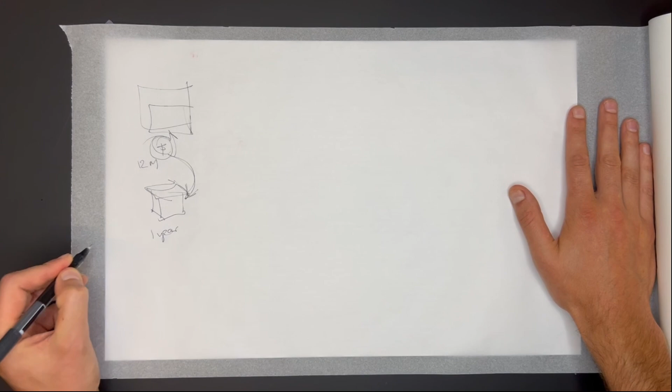So I did some research, and basically the numbers ended up being 10 grand. I don't remember what the monthly rent was, but 10 grand. So I needed to build this little office space for 10 grand. Then the other thing going on was, I was renting our home. The landlord had a coach house with a motorhome in the bottom, and we lived up top.

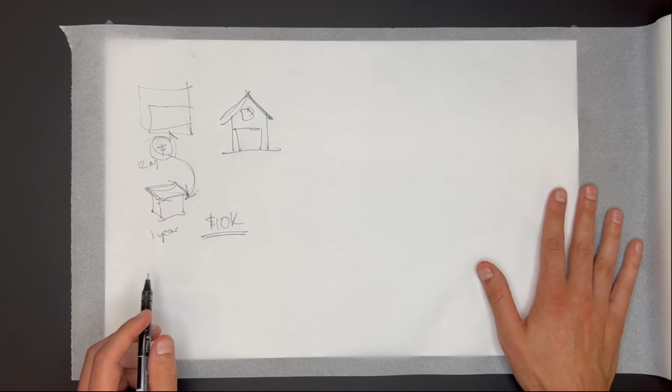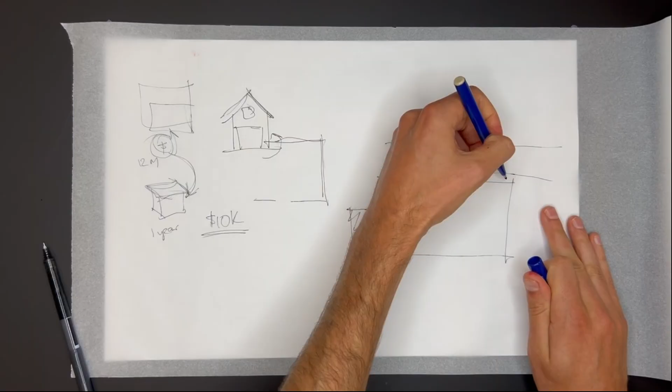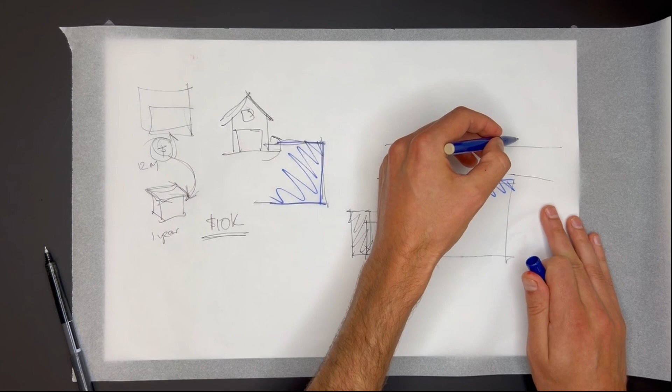And then behind there, there was a small little spot. So if I was to draw, here's the little coach house. There was a driveway that kind of came around the side. My door in was right here. Actually the patio was kind of like this. We had some garden beds here. There was a shed here. So we're kind of looking at two buildings. There was a hedge and trees. Here was garden beds in there, door in, stairs down, a bit of a lawn.

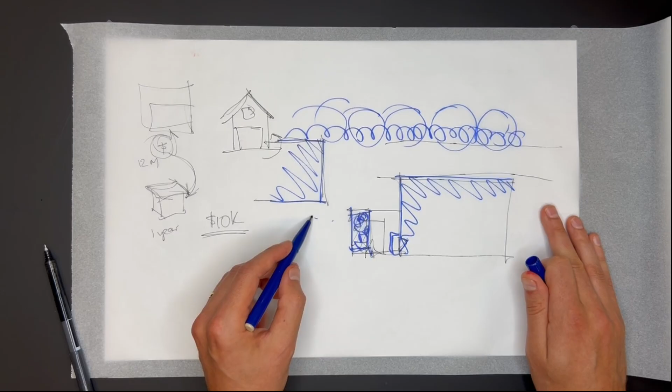And so I spoke with my landlord. So where can I build something here somewhere? Because this was kind of my space-ish. And he was very generous. He said, yeah, sure, go ahead, as long as I can move my lawnmower in and out of here, and I can move my trailer in and out of there, and I can pull in and turn around with a vehicle and all that stuff. So eventually I had a clear space of kind of this. It ended up being very small.

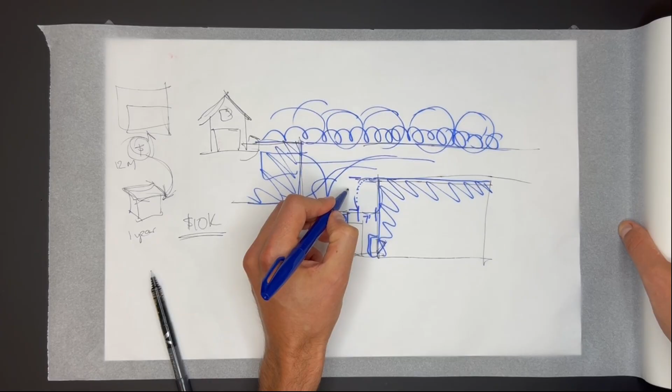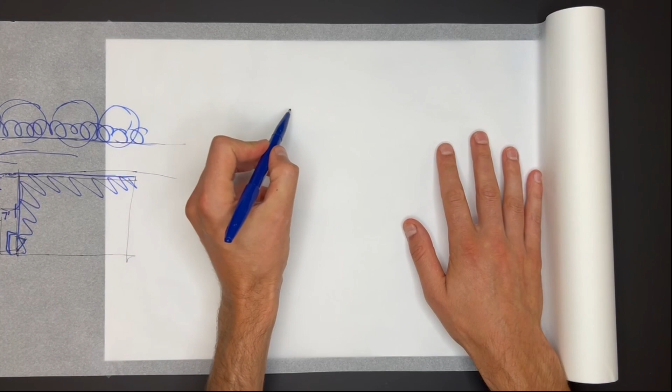So how big was that? It was about 7 feet by 11 or 12 feet. So I had kind of a 7 by 11 rectangle to work with. So quite small, 77 square feet total. At the end of the day, I was going to be working in this 12 months of the year. It had to be insulated, so you take some space off of that for wall thicknesses. And the space I really ended up working with was 6 by 10. So this became a 60 square foot studio.

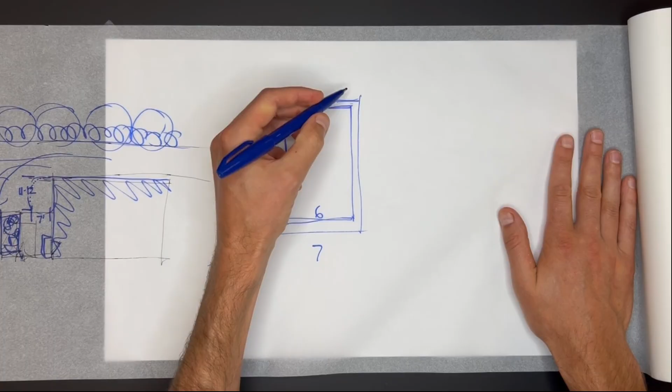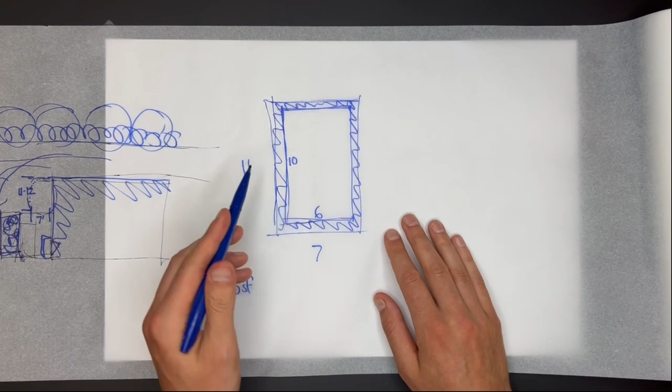And that was an interior space. And then once you built the walls up, it ended up taking up my full 7 by 11 approximately. So that's how that happened. Now this space in here that I was working with, this is south. This is north here. So the sun, I'm living in Canada, the sun comes around like this. Wait, no, I'm looking at this wrong, sorry. All right, north was here. Yeah, this is making more sense. So north is up.

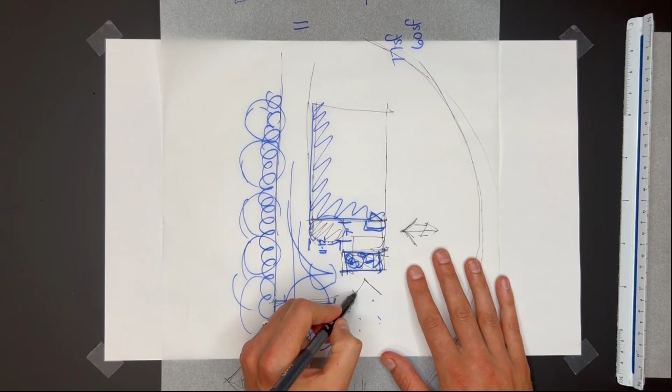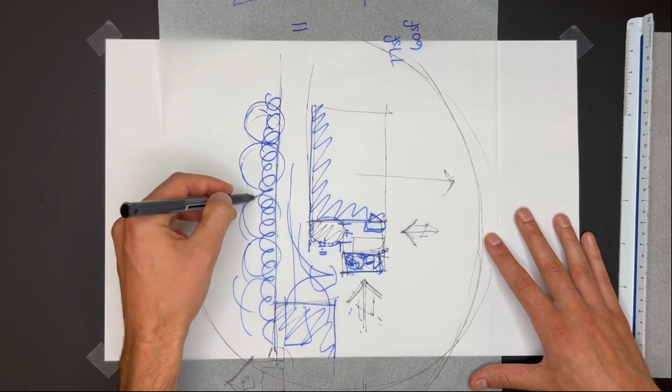So the sun is doing this. I had really good morning views that way. That's why I'm remembering this. This was east. I was totally obscured this way, west, by these big trees. And the view this way here was trees as well, mostly. There was a neighbor's house kind of over here, but that was pretty far away. It was pretty private space in here.

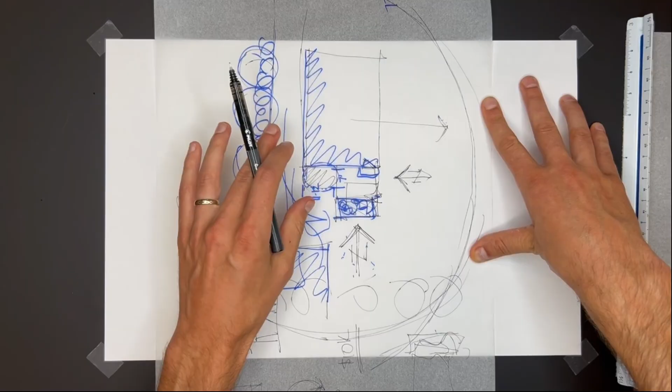So this studio in large part started with views. If I was to look this way, I would like the view up here, up towards trees. That was nice. But down here, you're just looking at cars. I parked my car here. My landlord would be pulling in and out. View this way, kind of garbage. I'm looking at an open shed here, a lawnmower, and just scrap wood.

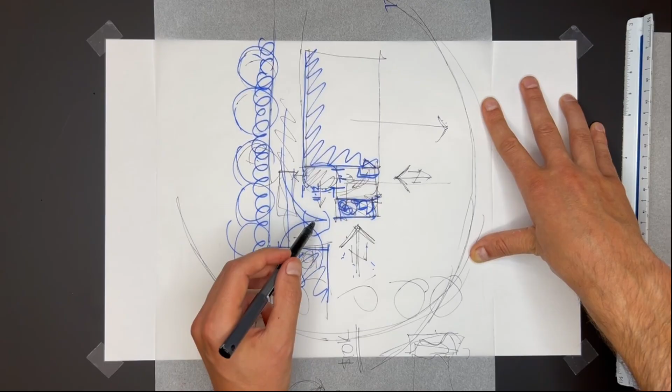View this way, super nice. Morning sunshine. I was starting work quite early in the mornings. Morning sunshine, looking at my gardens. I could see my family entering and exiting. That was great. So what this studio ended up being, I'm drawing this again. Okay, so here's north. North is up.

This studio largely ended up being, I'm going to look this way. That's at eye level. And then everything other than that, these are fine to look up and out. But there's nothing really to look at eye level. Here I was against the house, but the sunshine would reflect off and come in. So here as well, looking kind of up is fine to get some light in.

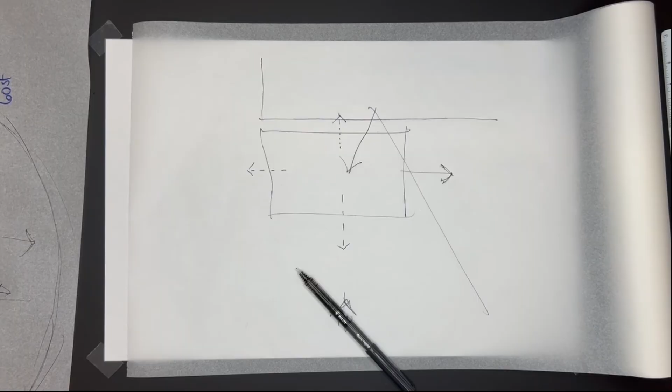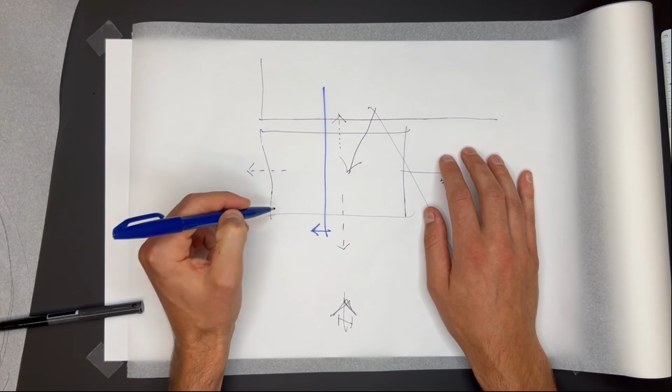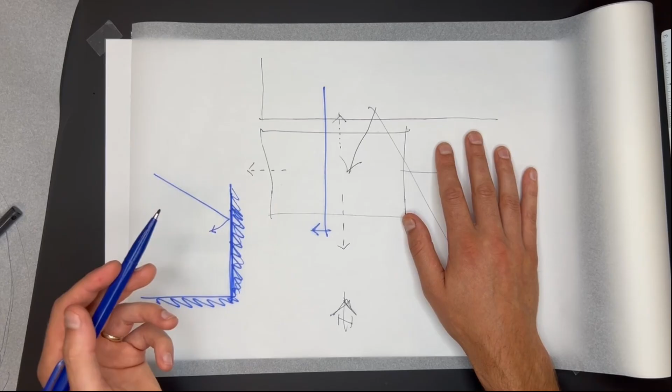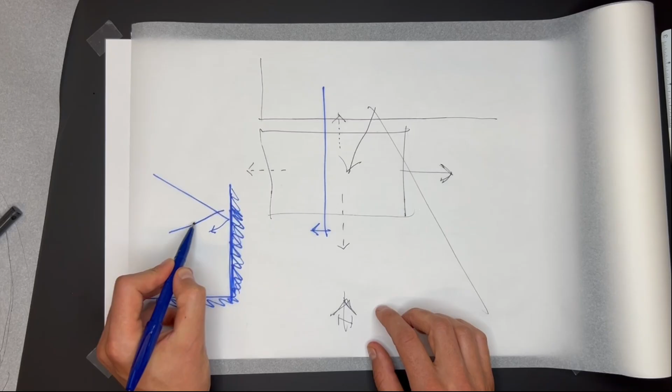Now, the other component of this, if I'm to cut through and look this way, I've got my landlord's shed and my house, or coach house. The big coach house where I was living on the second floor is right here. Here's the ground. Sunshine's doing that. My landlord said, okay, just one constraint, please: slope the roof away from the coach house, because rainy climate, so all the water would run off away from the coach house. So fair enough. That's what we did.

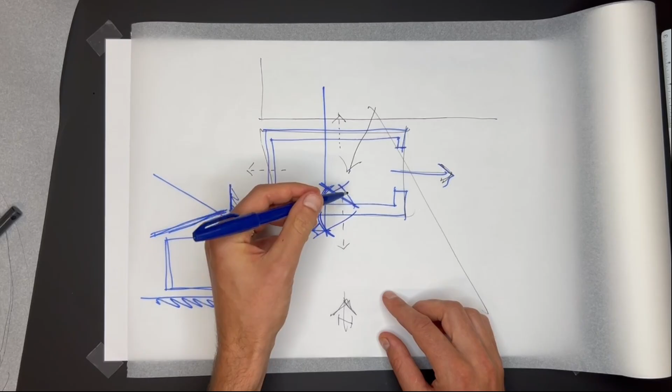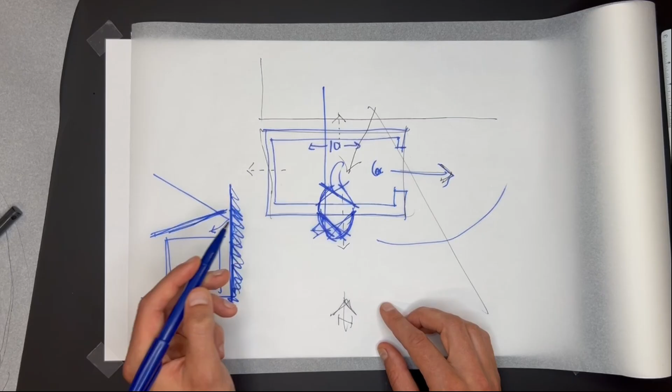So already now you can kind of see, I had something like this where you can look this way. This was kind of the logical point of entry. Actually, it's this way. No, it was out. You swing out. It was too small. 60 square feet. 6 feet here, 10 feet this way. It was too small to swing a door in, so I swung the door out. And then it swung this way, because I came from here. Obviously, you can tell it's been a while since I designed this. I'm just kind of recapping it now for you.

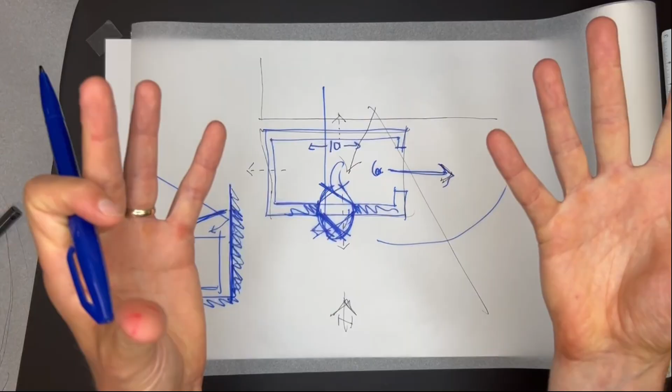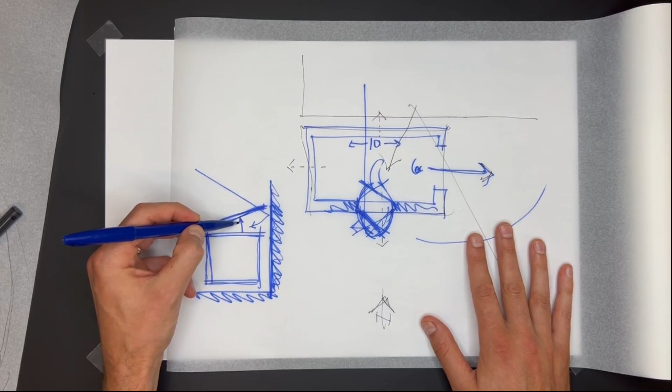So, the door swung out. I would look this way, and all the views everywhere else were just up. I wanted to have lots of light because I love sunlight. I want to not turn the lights on if I at all possibly can. So this very much ended up being kind of a box with a lid that was lifted to slope rainwater off and allow an open perimeter all around it. With such a small building and a few major constraints, it was really quite a simple form exercise to end up with: okay, here's your window out, here's your door. So basically a box.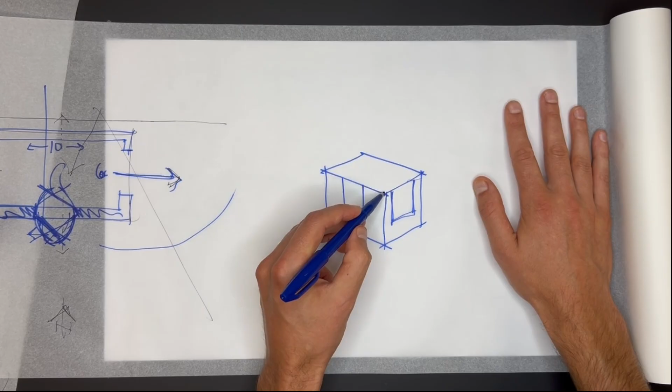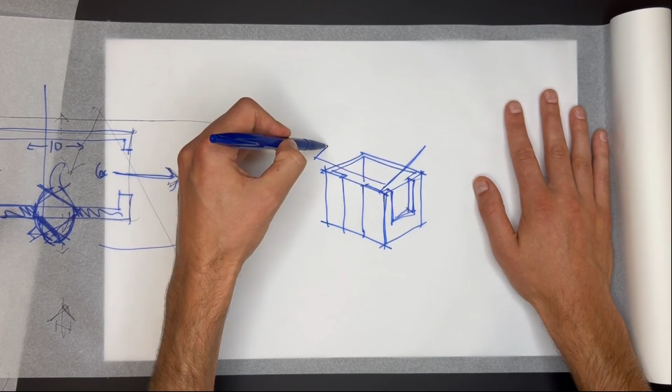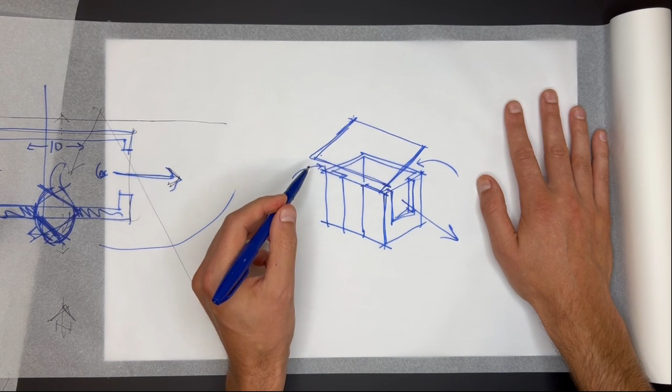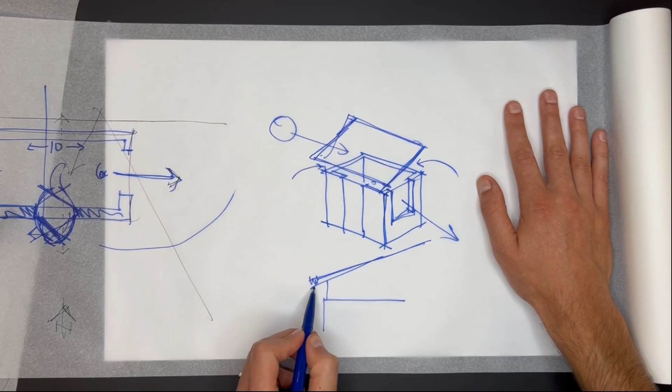And put a lid on there, slope it, to pull in light at the top, view out one way, and sloping it this way, I could shade much of the south sun. So the overhang on this was calibrated in such a way that, here's a section again through here, light at 45 degrees. Where I am, between March 21st and September 21st, the sun is at an angle above 45 degrees, and it's also the hottest at that time of year, late spring through summer. That hot sun would be shaded by the roof overhang.

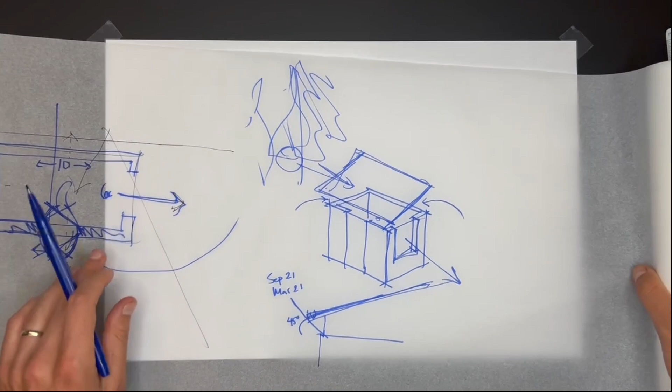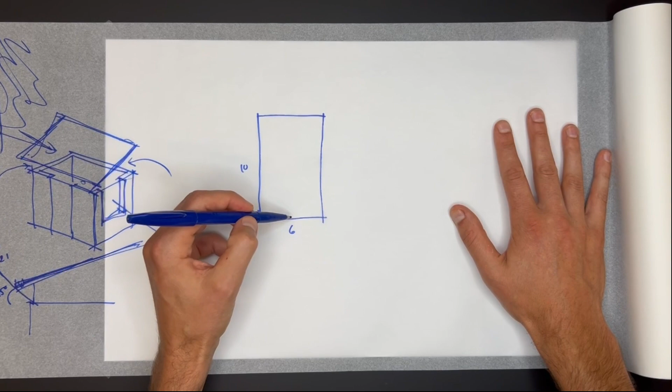The sun coming in the western side was shaded by these trees. I had these really, really large trees there that essentially created a wall for the western sun. So really I was shading the south, I was already blocked from the west, and I was accepting the east morning light. So I had a very simple form, right away, just given to me out of pure constraint. I had in plan six foot inside, 10 feet inside, window here. So I had these dimensions, the 6 and the 10.

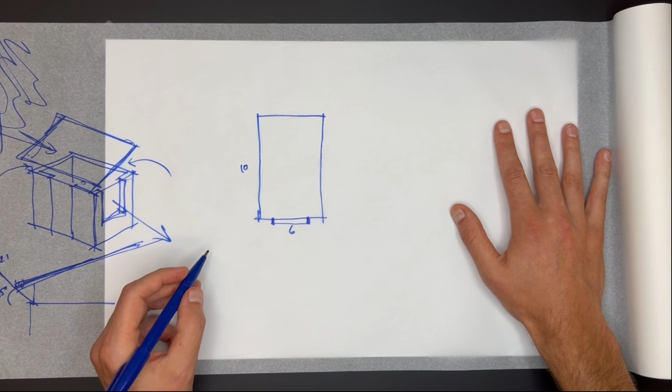We build out of dimensional lumber here. So after that, I decided, what's handy for me as an architect when I'm designing is to actually see the construction of how things get built around here. And here, it's a lot of light wood frame. So we use 2x4 lumber, or 2x6, or 2x8, 2x10. It's wood. Wood studs for walls, wood joists for floors, joists for roofs. Usually you get kind of I-joists for floors or roofs.

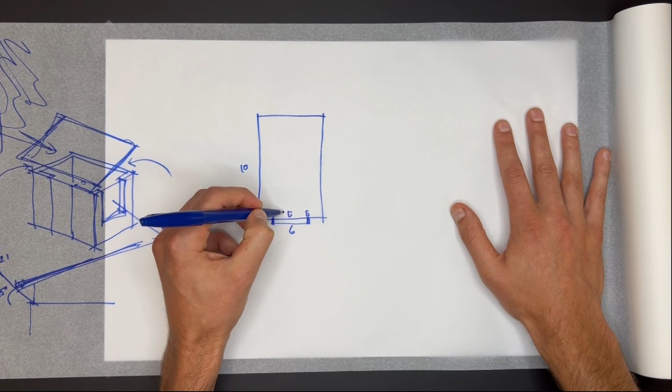So that's what would be handy for me to actually see in my space as I'm designing, to see the construction, the materials that the buildings I'm designing are going to be built with for the most part. So I thought, okay, I'll expose that structure. I'll bring it all to the inside, and usually it's kind of like a 2-foot bay. So it was a 6, and then it was a 10. So it was like 3 bays and 5 bays of structure. So it ended up being like that, and like this.

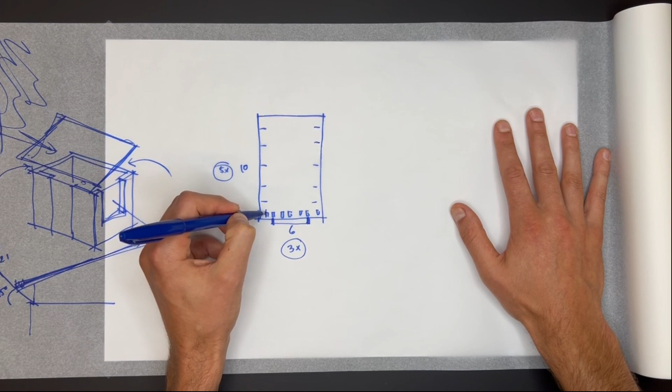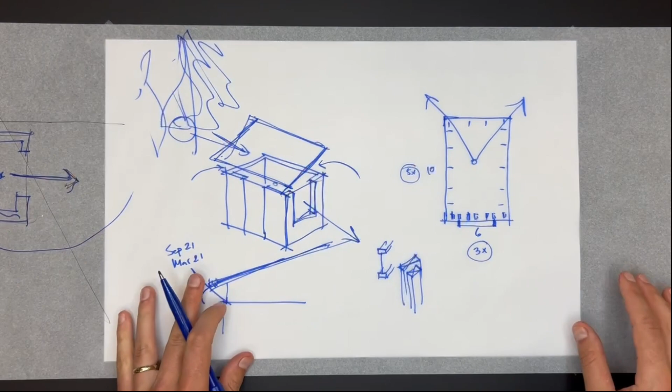Except I wanted to pull off the corners. If I was looking up and out, I wanted to pull off the corners and keep this perimeter as clear as possible, so it would feel like this lid was really lifted off. So what I did was I took my 6x10 box. I did something that was interesting, but ended up making it harder to build. I pulled the structure 1 foot off the corners.

So then I ended up basically, so 1 foot off of 6. I had 4 feet here, so there was a stud in the middle, stud there. And this was 8 feet from outside stud to outside stud. So it was actually 4 bays, 5 studs total.

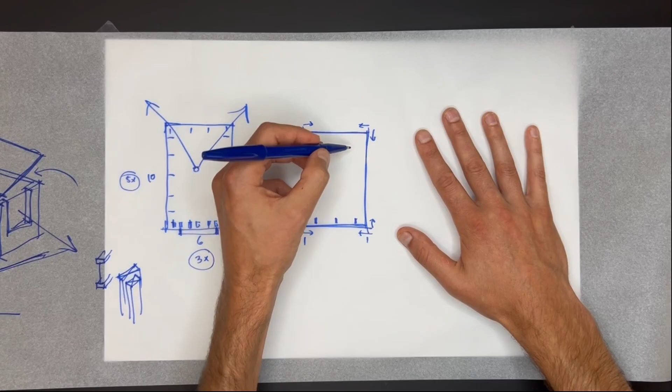Middle, that one, that one, that one, that one, that one. So it was kind of like this internal skeleton. And if there's a door here, this one got removed, and I had a beam above.

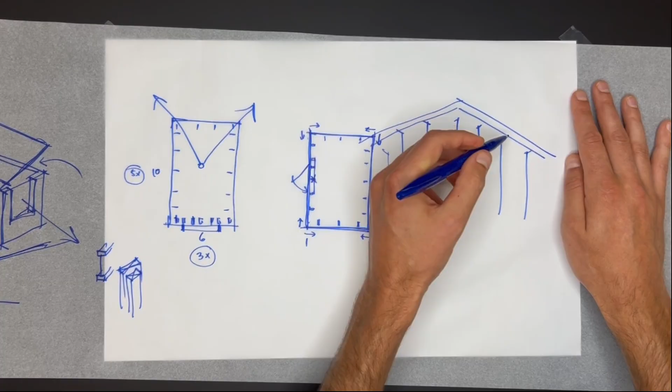So what this in effect was doing was, I had this skeleton of exposed studs that would be wrapped in an insulated skin with a fully transparent window above. The studs would continue past, and then the window would continue behind. There would be no frames, and that was where the light ribbon name came from.

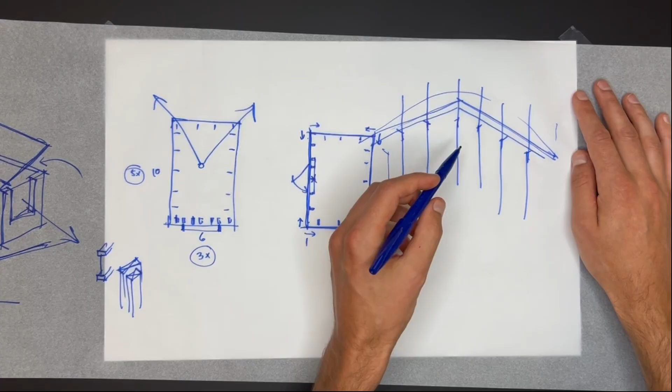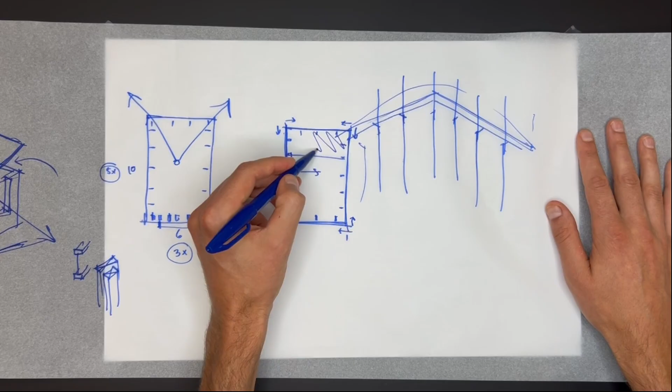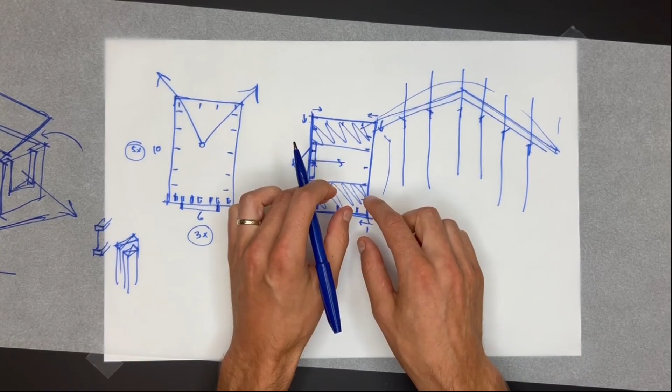So this in plan was very simple. You have a door, you walk in. I had a desk to sit at and a desk to stand at. I wanted to incentivize getting up, standing while I worked, sketching while I stood, model making while I stood, and to incentivize that, I put that one by the window so I could see out while I did it.

Whereas my computer tasks over here were much more focused, zeroed in, so I had no window there. I had my walls with books, no distractions, just zeroed in on my screen, my keyboard, and I just plugged away. And then I would get out of my chair and literally just turn around. My model making stuff was all here. My sketching stuff was all here. So that's, in general, the idea.

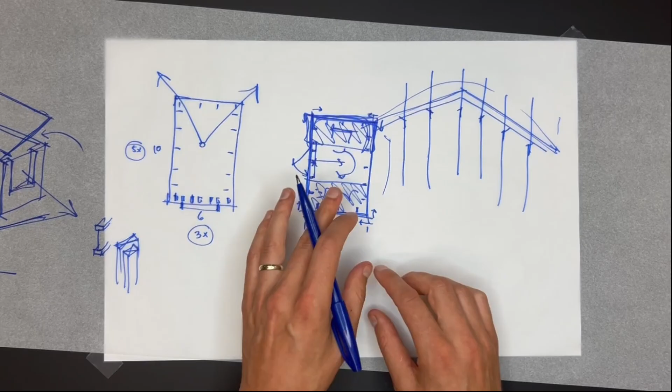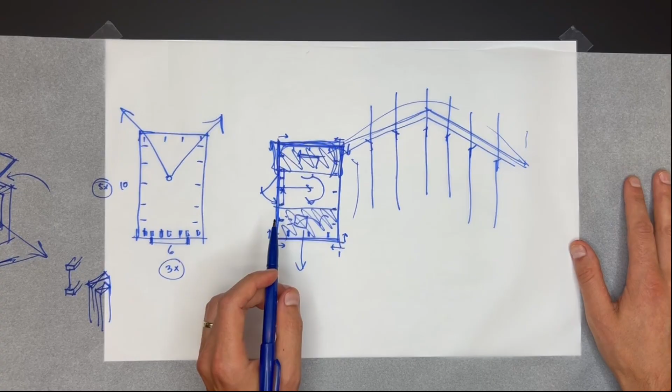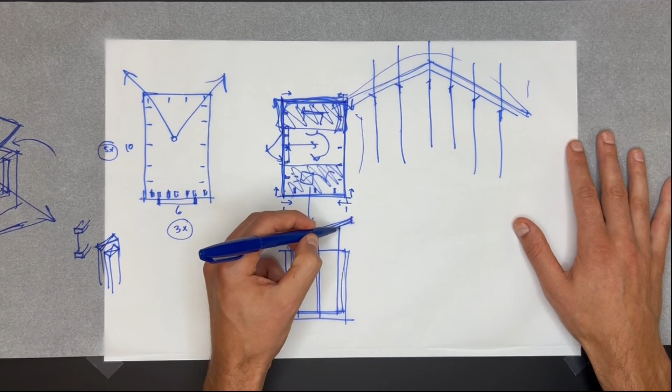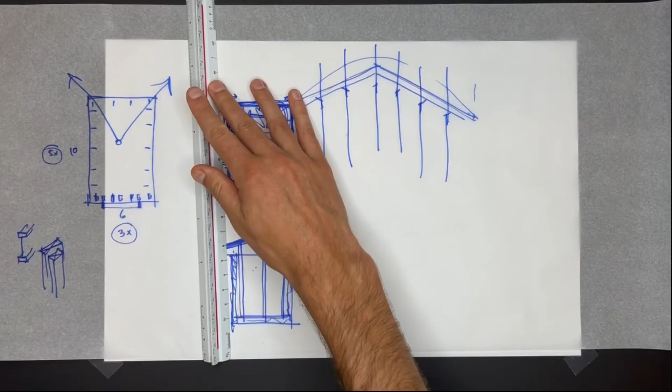This very much became a design that was resolved in section, not so much plan. It was how do we make this really simple space appealing to be in. And that largely came down to lifting the roof off, expressing that structure with very small, spindly sticks holding up a sloping plane, which I wanted to feel very light. And then this is insulated and exposed. So how to make this a nice space, that was the main design challenge.

So I will draw that over again here. Sloping roof. I wanted this to feel light inside. It's a small space. Can't say that enough, it was a very, very small space. I wanted it to feel light and airy, thus the clear perimeter around the top, to kind of breathe a bit. But then the weight of the structure, I felt, was a very big part of that.

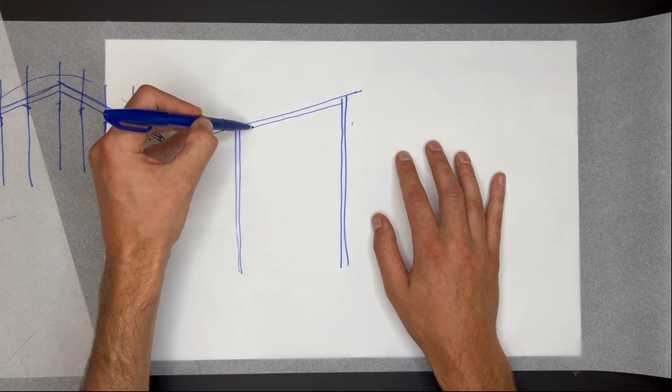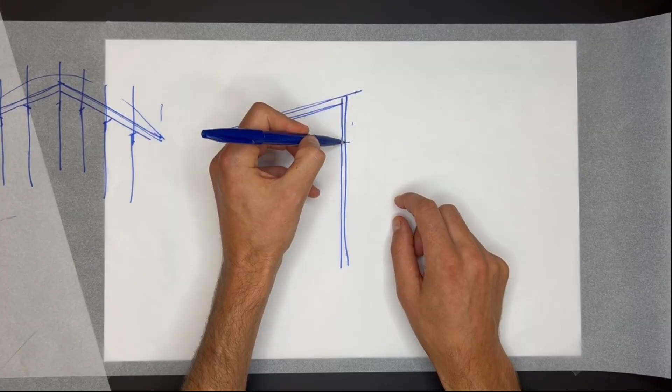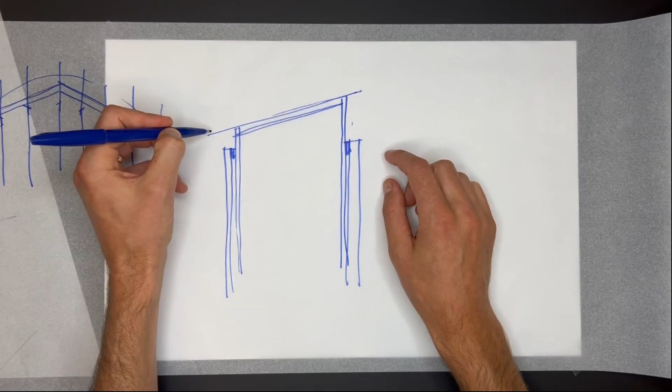So I minimized the weight of all the structure holding it up. The pieces of wood were as small as possible. There were no cross members between them. They were all braced by very careful stuff around the edges. And this roof in particular became quite important to feel light. So how do you do that? I eroded the edges of it.

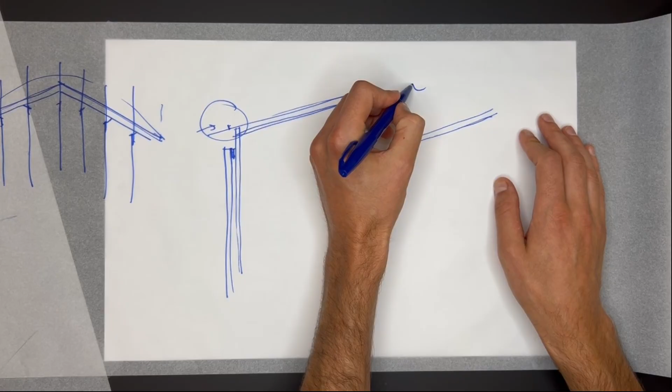So this roof, if I was to blow this up in detail, was a corrugated steel on the outside, and because corrugated steel has this wavy profile, it can actually cantilever itself. It can support its own weight. So I just cantilevered that out all by itself for the full overhang here. That was 12 inches, and supported it as far back as I felt comfortable.

With my snow load, this did not sag at all supporting itself over 12 inches, even after ice and snow and all that stuff. So I supported it 12 inches back so that this could just support itself and be very, very thin. This is less than 1 inch thick here, less than 25 millimeters. So I pulled the structure back from that.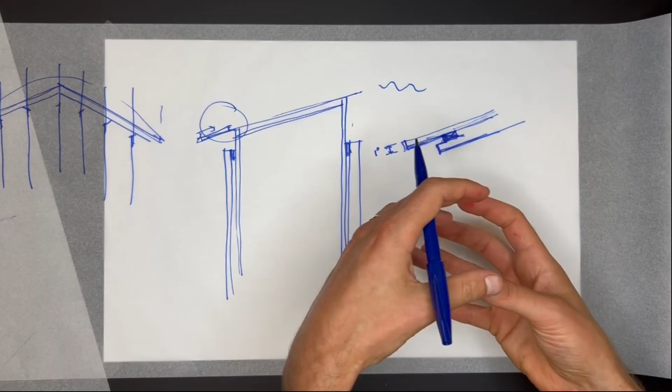And then this was the strapping underneath the steel. The main roof structure below that had this kind of profile so that when you're looking at it, you were seeing this little bit, this little bit, this little bit, all separated and pulled apart from each other, so it felt much more lightweight. It was not a big chunk of heavy roof. It was pulled apart, so it felt way more lightweight.

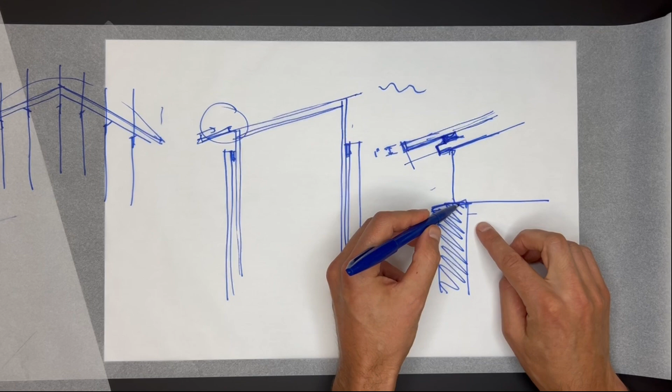Then the glass, very, very thin, would sit on this heavy box, just a wood box. So there was a contrast between my heavy wood box on the bottom and this really delicate roof off of that. The structure was pulled off of this heavy wood box and just went up very lightly.

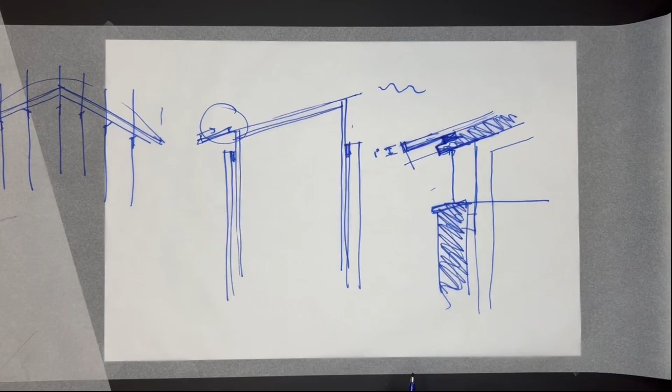To support. This was all insulated. This was all insulated, so it was warm all year round. So that was a major part of it.

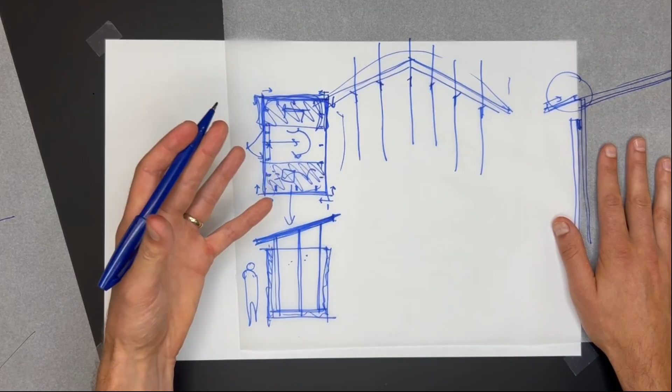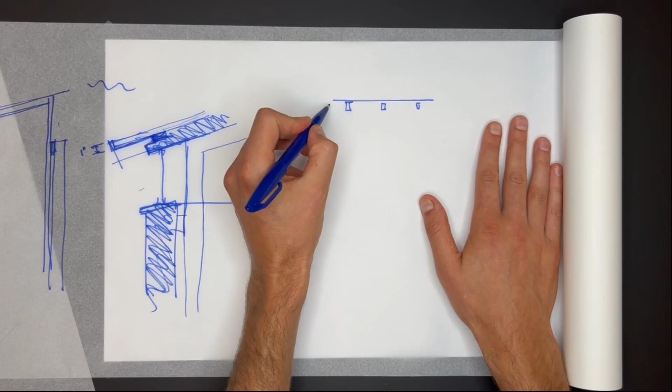One of the complicating bits, though, when I exposed all this structure, was that you have all these studs at the perimeter of your desk. That could have been a negative, but good design takes a negative and makes it a positive. So you just use it. Don't fight the constraint, just use it. So I had these studs. I had my shed.

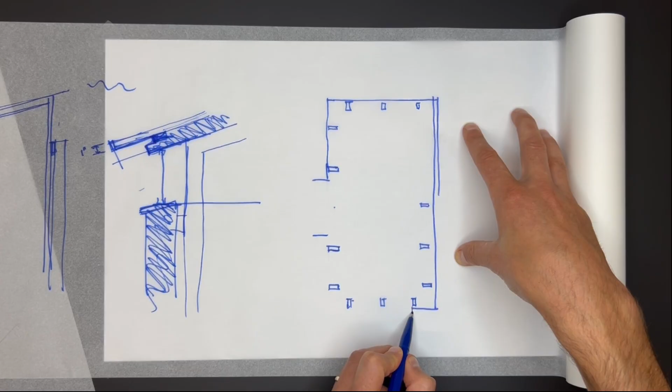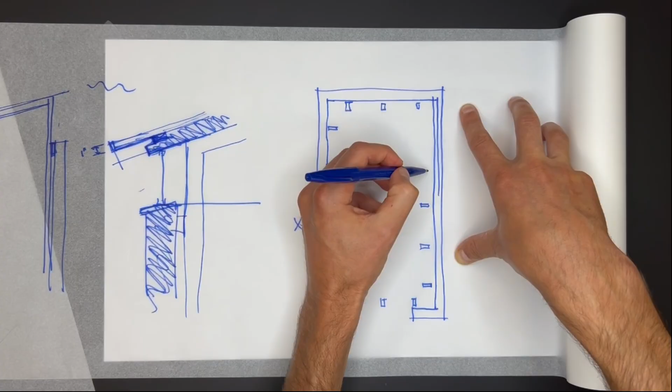Give me a sec here. I'm just going to draw this out in somewhat scale, or at least proportion. Get the proportions right. Whoa. All right. Okay, so proportionally that isn't quite there. It's a little skewed, but all right.

So I had these posts, tiny little, like they're 1.5 by 3.5 inches. So instead of just trying to notch around them everywhere, basically what I did was take my desk and I built my desk like this. And then I recessed this edge. This became desk, trough, wall. And in this trough, I put cups with pencils and pens, and I put like cords or my stapler, so it essentially became like a utility trough. I ran my cords in here, so I didn't have any cords cluttering on my desk.

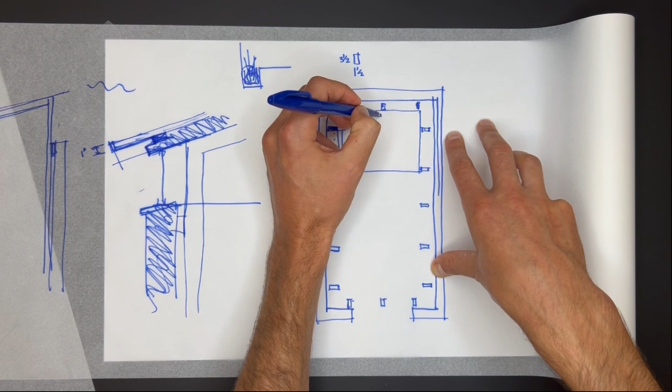And then above, I used these as structure to create bookshelf, bookshelf, open corner to put a plant. And then same thing over here, a bookshelf along the edge. No bookshelf here. No bookshelf there. This was my desk, my standing desk.

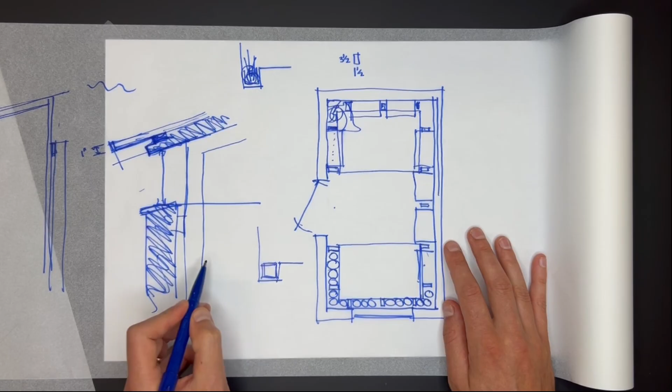So here again, I had cups. Cups with pencils, cups with pens, cups with knives to make models with, cups with everything, rulers. It actually ended up being really quite nice. I'd kind of color coded my pencils in here, so it became a color gradient as you went along. This little detail ended up being one of my favorites of the whole project. Just this little kind of trough around the edge where I could sink a cup into there and have stuff in it, and it was just a writing surface. It made something unique, and it made something very deliberate for all the clutter that would normally be annoying.

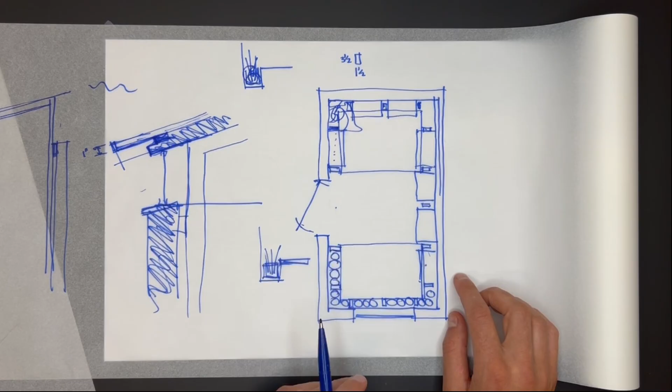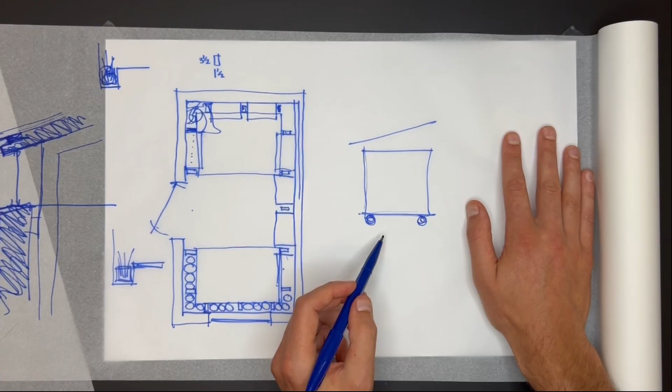So there you have it. I guess there were some other elements to the design. Obviously there were many elements, but I wanted it to be portable. I was renting, so I put wheels on the bottom. I lifted it up and I put wheels. And I ended up actually moving the studio when I did move. I moved it twice. Moved it to my new house, and then I moved it when I sold my studio when I didn't need it anymore. So this ended up being a great little detail.

The door, this being a very defined, heavy box with the delicate roof above there, I made the door match the wood. This was all clad in wood, and then I clad the door as well, so the door just blended in to the box.

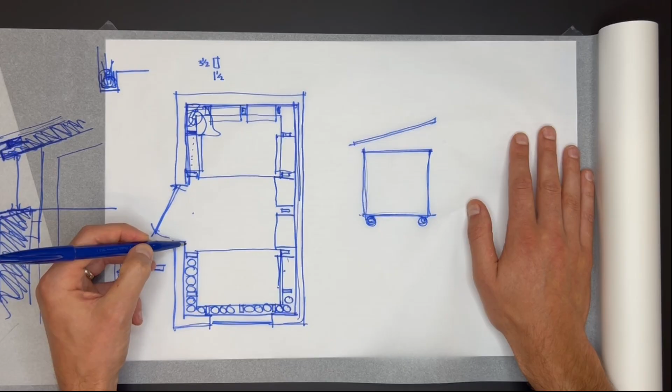What else? Oh, the inside was all wood textures. It was plywood. I think I did this wall out of OSB, oriented strand board. Not very pretty material, but as I was designing, I wanted to see these materials. So I had one wall in OSB, and all the other ones were kind of a nicer plywood. Floor, desk, walls, underside of the roof. It was all plywood. The studs were wood.

It ended up being just a wood box inside, which was an incredibly important decision because it felt so warm in winter. It was just a really comfortable space. It smelled good. It was not an afterthought. It was deliberate, but the benefits were more than I even expected.

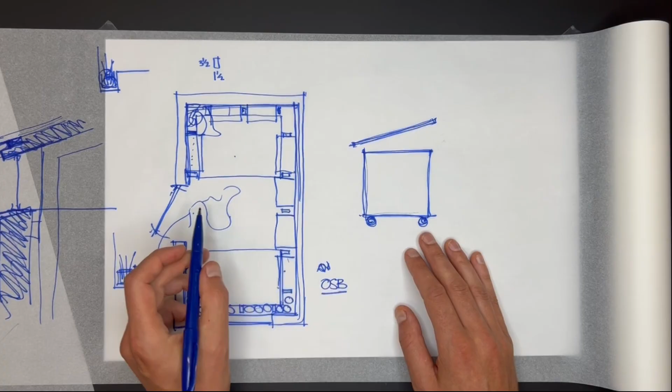I guess the biggest negative of a space this small was I would walk in, and it rains a lot in the Lower Mainland, in the Fraser Valley in British Columbia where I live. So I'd come in with wet shoes, and I'd track some moisture in. That was the biggest thing. So what did I end up doing? I had a little spot here where I would put my shoes, and I had office slippers inside here, and that ended up solving that little issue.

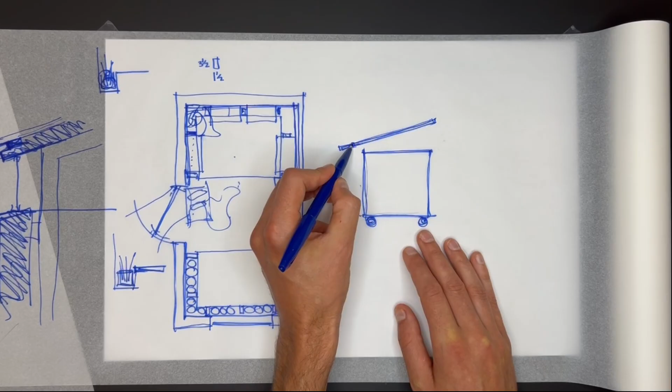But I think if I could have done it again, I would have extended this a little bit further to create a bit more of a covering, because the door swung out. A bit more of a reprieve from the rain as you're trying to open that door. So I designed that overhang based on sunlight, but I should have designed it even more based on rain.